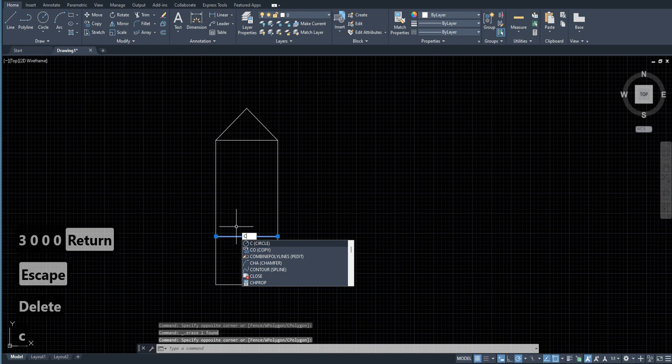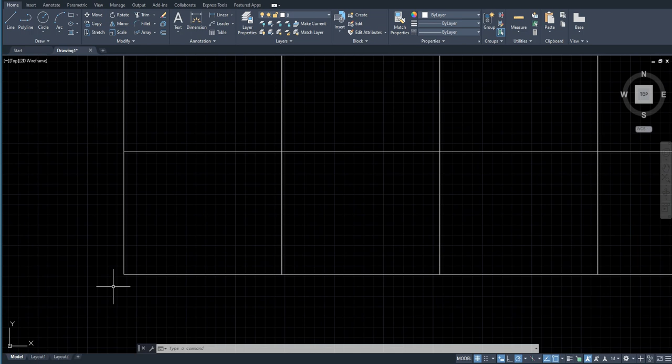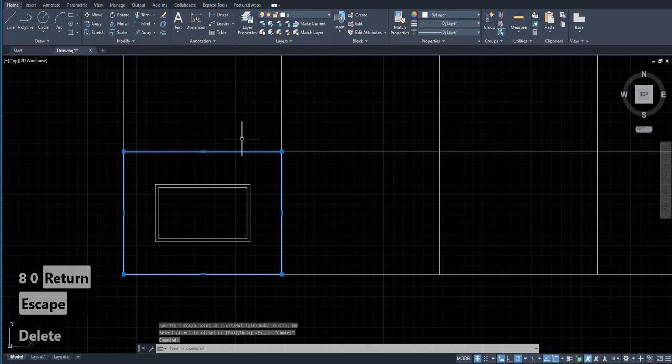Suppose I have these 4 little houses connected to each other, and I want to make a window like this. And I made one window, and I want all of the floors and all of the 4 houses to have the same window. So for that, I'm going to use the command rectangular array.

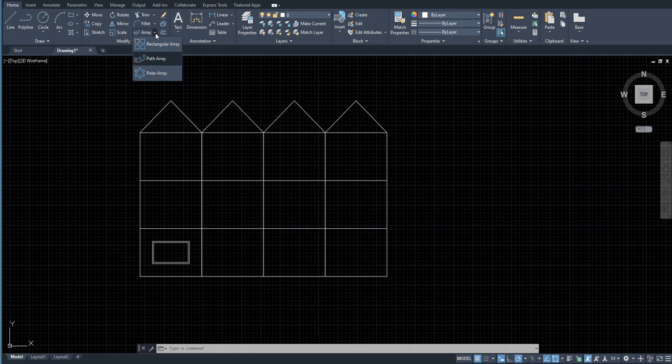I just go on this small arrow, and click on the drop down menu. From here, I select rectangular array, and it's asking me to select the objects. So I select a window and press enter. The moment I pressed enter, you can see there are 4 columns and 3 rows of the same object that have appeared in a grid kind of format.

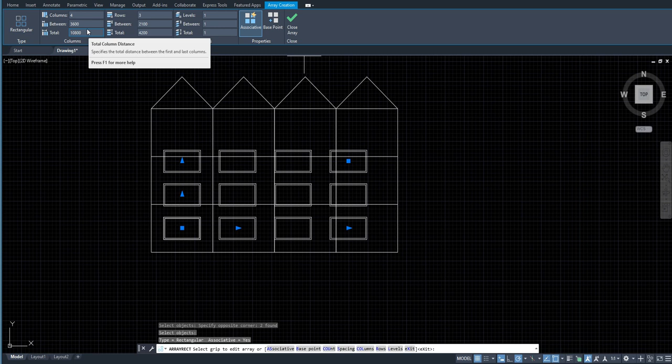Above in the home panel, you can see a new ribbon has been created called array creation. Here you can see the type of array is rectangular array, and there's a section for columns which says the number of columns is 4. The rows section shows the number of rows as well.

The levels command is basically used in AutoCAD 3D, and in this particular tutorial we are discussing AutoCAD 2D, so I'm just going to skip this. There's also properties and close array - close array just closes this ribbon. I'm going to be discussing each of these ribbons one by one.

Over here you can see the default number of columns and rows for the array command is basically 4 and 3. This is the exact number of rows and columns that we're going to need for what I was going to do.

Just for your sake, I'm going to change one of them to say 5, and you can see a new column has appeared towards this particular side. I'm just going to press Ctrl plus Z.

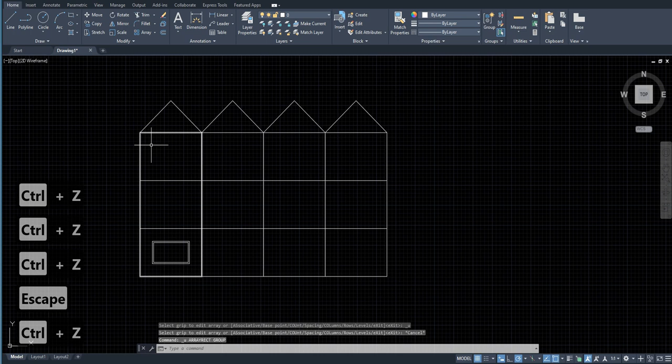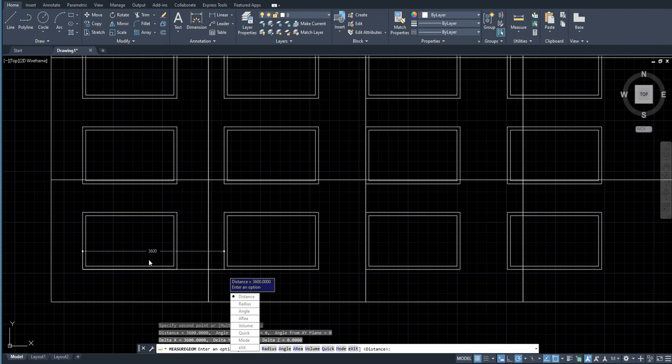Over here it shows the distance between the two columns. So I'm going to show you the distance. You can see the distance here is 3600, and if I select this again, it's showing the distance between them to be 3600.

This particular distance is between any two similar points in the array. So the distance center to center is 3600, the distance corner to corner is 3600. That's how it works.

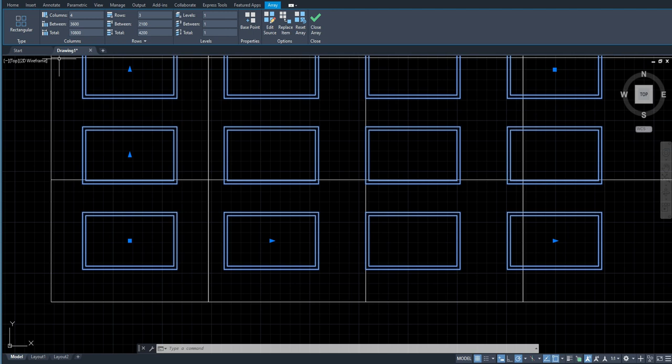Over here you can see the total distance to be 10800, as you saw. I'm going to select this once again, and increase the distance to say 3000 or 5000. I guess 5000 will do. No, I'm going to change it back to 4000.

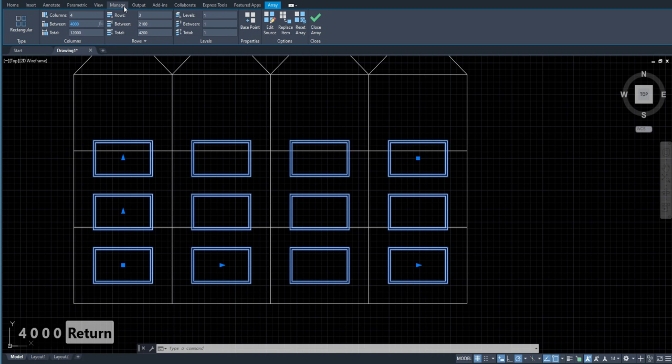And it's perfect. So the rows column is particularly similar to the columns. You can see there are 3 number of rows. You can increase the number of rows however you want, and the distance between them and the total distance. I'm going to increase the distance between them to say 3000, and it fits perfectly.

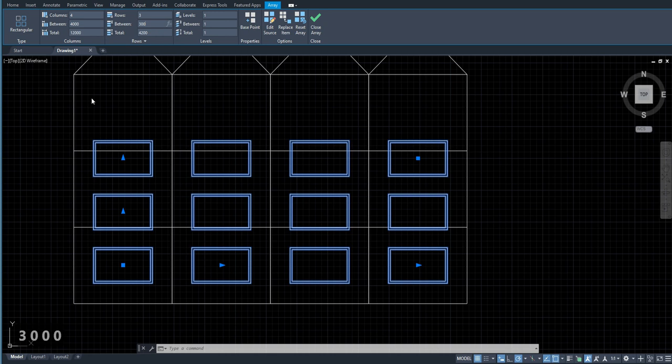Now if I exit this array command and select the window, any window for example, I just select one object and the whole array gets selected, because AutoCAD treats this whole array as one particular object.

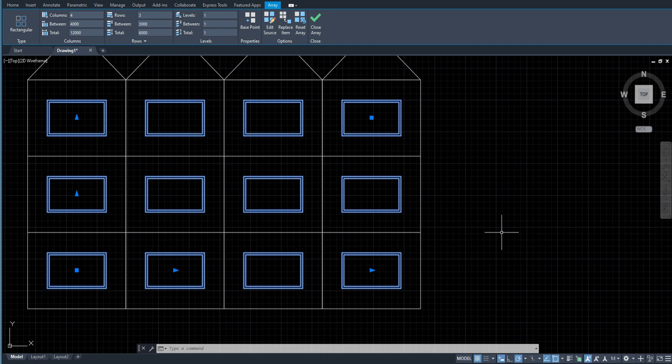You can see there are various arrows in our array, so I'm going to tell you what they mean. The first point is the small square point in the left side bottom corner. If you select this, it is basically used to move the entire array to different places.

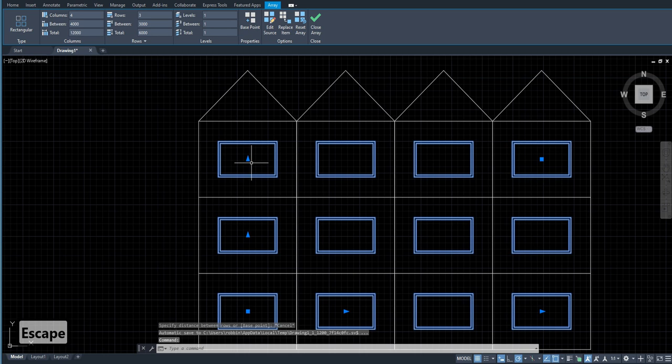This particular arrow helps me increase the distance between two rows. And this particular arrow helps me increase the number of rows. So if I select this and drag my mouse, the number of rows keep increasing.

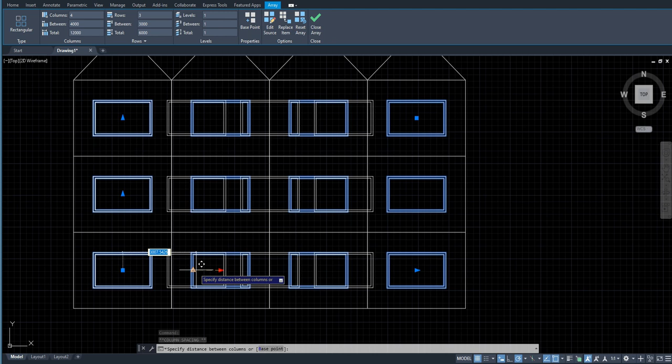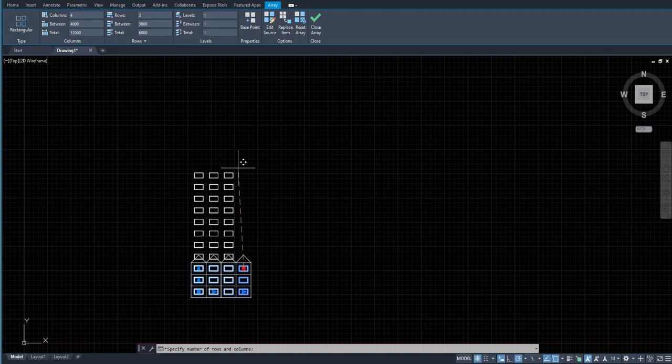Similarly for the columns side, if I select this particular arrow, it helps me increase the distance between the two columns, and this particular arrow is used to increase the number of columns. This point on the top right hand side is used to increase both rows and columns simultaneously, while keeping the distances we specified earlier the same.

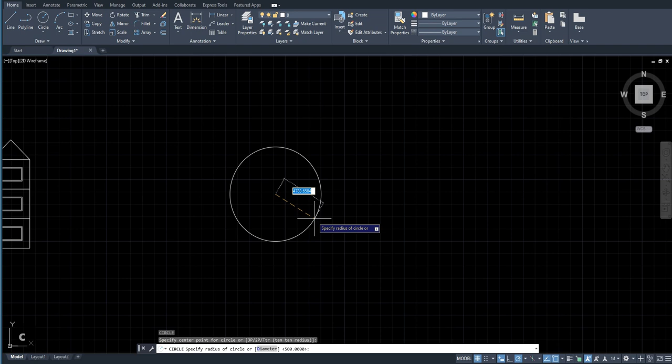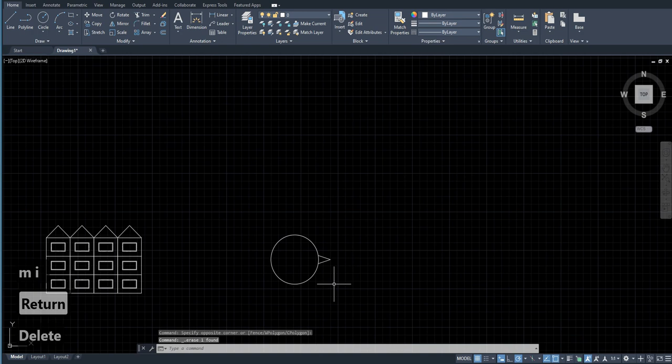So I hope you understood what rectangular array is. The second array we're going to be discussing is the polar array right over here. So with that, I'm just going to create another example. So you can see I just created this small triangle kind of figure with this circle.

Polar array is basically used to evenly distribute object copies in a circular pattern around a center point or an axis of rotation. You can see how it's used in creating different copies of a chair around a table. This is just an example AutoCAD is showing.

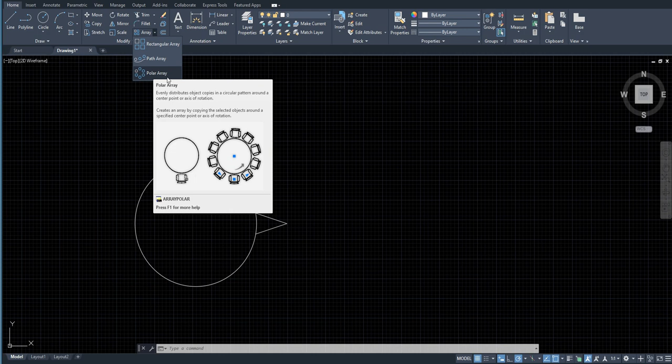Because over here we don't have distance, we have angle - this distance is measured in angles. So the angle between these two items is 60 degrees, and the fill is 360 degrees. That means the total area that all of these objects are covering is 360 degrees, so it's evenly distributing all these items across the whole circle.

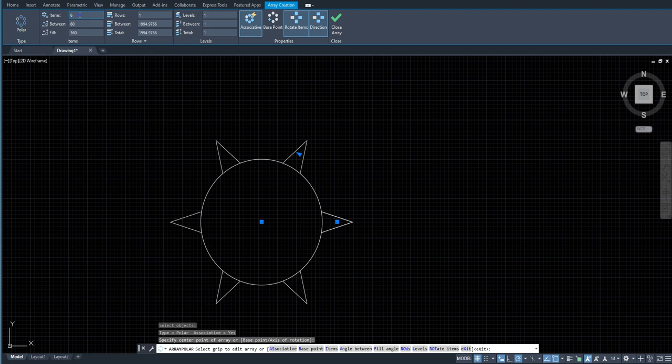So if I increase the number of items over here to say 10, the angle between them has decreased to 36 and the fill is still 360 degrees. So if I change the fill to 180 degrees, the angle between them has changed to 20.

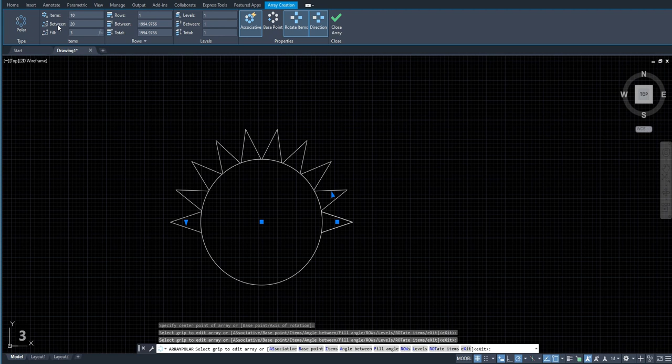So if I again change the fill to 360 degrees and attempt to increase the number of items to 15, the angle between them has changed to 24 and the fill is 360. So that's basically how, if you understood, what we increase and what gets decreased. If you just try this on your own, I guess you'll be able to understand this better.

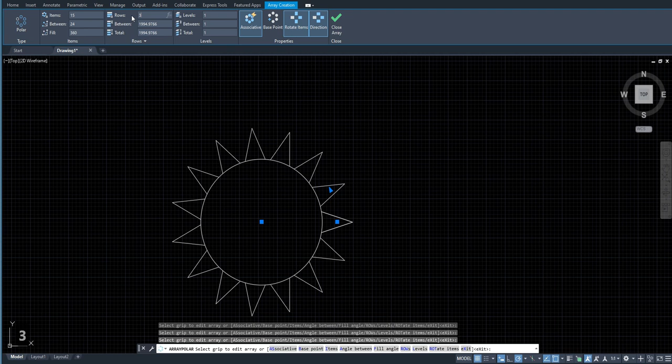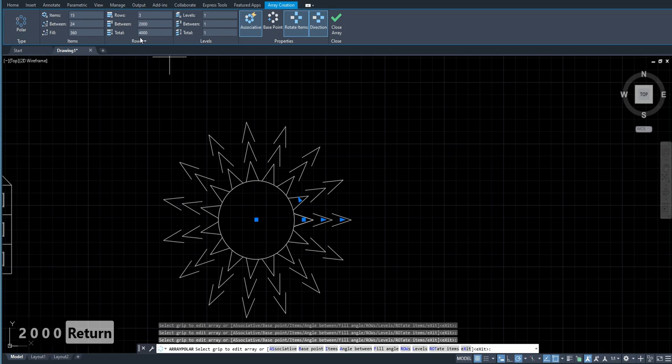The second part is the rows. The number of rows is presently set to default, which is 1. If I increase the number of rows, let's see what happens. If I increase it to say 3, you can see 3 objects there. There are 3 rows being created with the same center point, distributed along the same circle. The distance between them is set to 1994. You can change the distance over here to say 2000, and the total distance would be 4000 because we have 3 objects. The levels option is used in AutoCAD 3D, so I won't be discussing that.

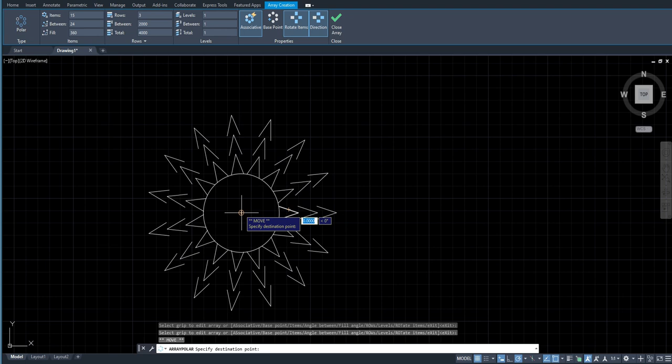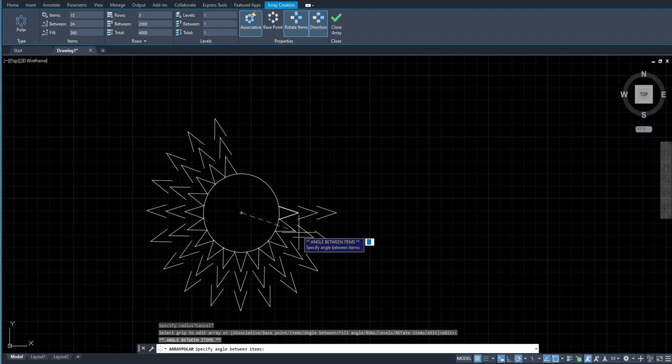Over here you can see there are also different points and arrows in this particular array. The center point is used to move the whole array to different parts of the workspace. This particular point is used to increase the distance from the center of the whole array. This arrow helps us change the angle between the two objects in an array. One of these arrows is used to increase the distance between two rows in an array, and this particular arrow helps us increase the number of rows in your array. So I hope you understood the polar array.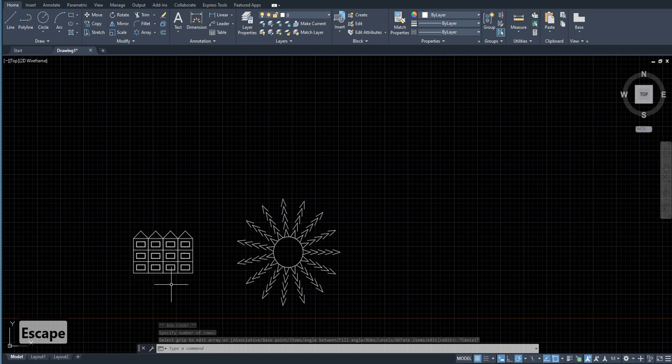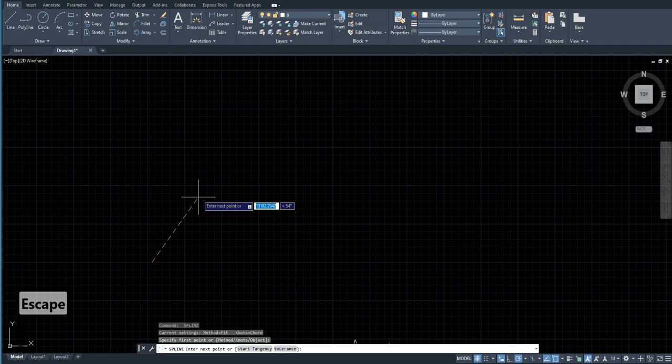Now we are going to discuss the path array. For that, I'm just going to create a path using a new command called spline. Spline is a command basically used to create curves in your AutoCAD file - it creates curves somewhat like this. So let me just make a curve. Over here you can see I just made a curve using the spline command, and as an object let me just make a circle over here. So the circle we have, and we have the path.

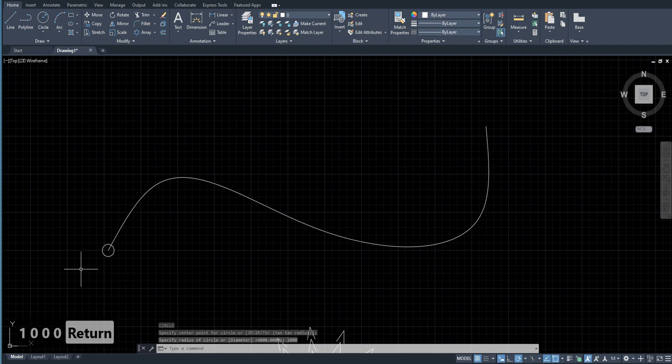So now I'm just going to select the small arrow and select the path array. For the object I'm just going to select the circle, and now it's asking me to select the path curve. The moment I select this path curve, AutoCAD has distributed my object along this curve using default values it already has. You can see the number of items is 30, the distance between them is 3000, and the number of rows is 1.

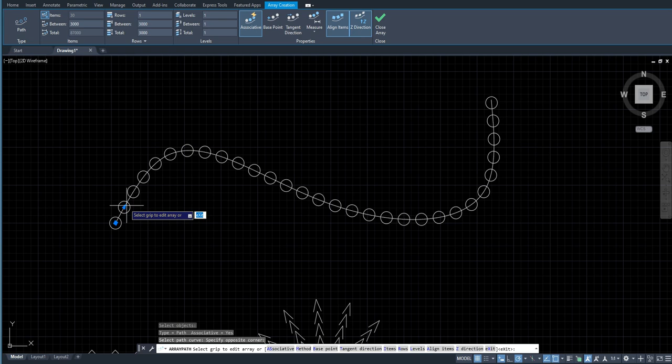So this is a particularly different type of an array. You cannot actually move the array. For example, if you try and select this point, it just basically increases the number of rows for this particular array. It does not change the position of the array.

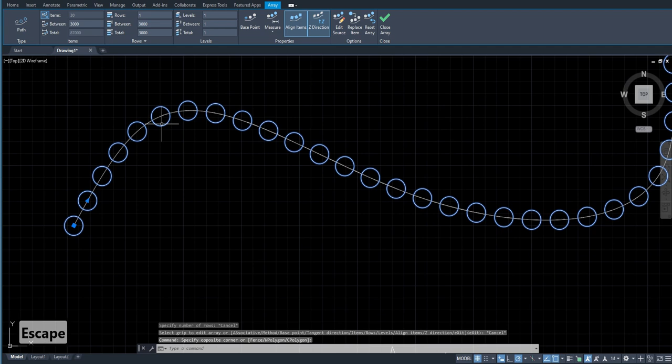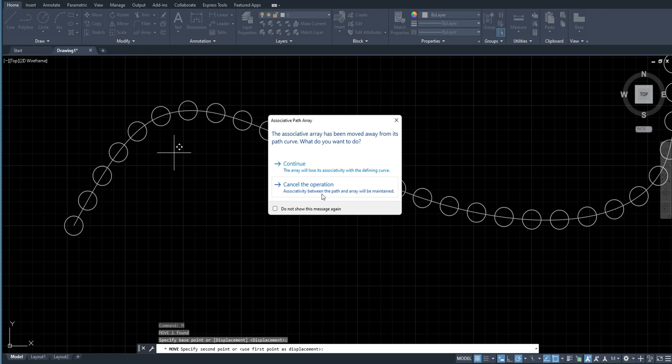However, if you think you can just use the move command and move our array, you see AutoCAD has shown me this warning which is telling me that you're moving the array away from its path curve. That means the array will lose its associativity with the defining curve, and if you cancel the operation, associativity between the path and the array will remain. So if I just move this array away from this path curve, it won't be an array anymore, it will change properties. That's the warning that AutoCAD is trying to give me.

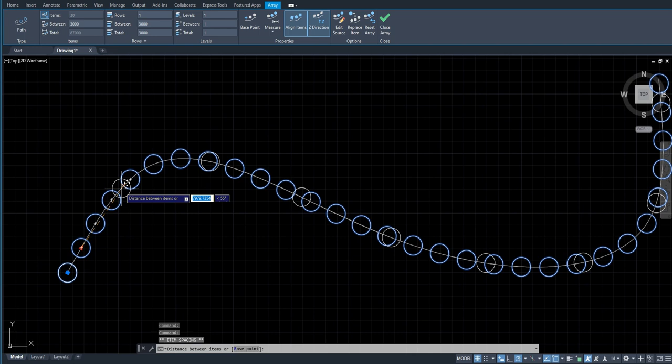And if I select this again, you can increase the distance between these two objects. Now the thing to be noted over here is that the distance between these two objects is along the curve. It's not the shortest distance, it's not the displacement between these two objects, it's actually the distance measured along the curve over here. So that's how the path array works.

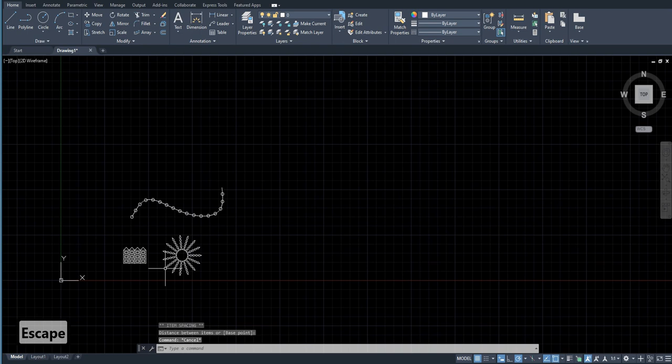The second thing we're going to be discussing is the command lengthen. And after that, I'm just going to create another example over here. Let me just delete this and I'll just create an example.

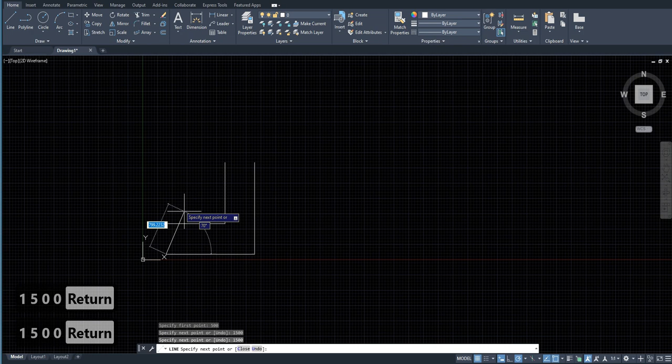If you saw, I just used very basic values for us to remember them, and the lengthen command is a pretty self-explanatory command. It lengthens lines or sections that are basically a part of lines, polylines, curves, etc. So the shortcut for lengthen over here is this particular batch, and also you can type the command lengthen from over here. You can see that there are 4 variants of lengthen, namely delta, percent, total, and dynamic. So by default the total command is being selected over here, so I'm just going to use that.

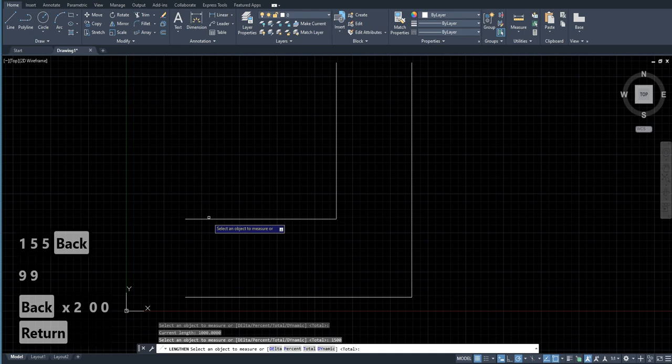Now if you remember, the length of this particular line is 1000 units. If I increase the total length to say 1500 and press enter, and if I go to this object by this particular line, it's just asking me to specify the total length over here. I'm just going to press enter, and if I go to this half of the line, it's going to lengthen from this point, and if I go to the second half of the line, it's going to lengthen from this side.

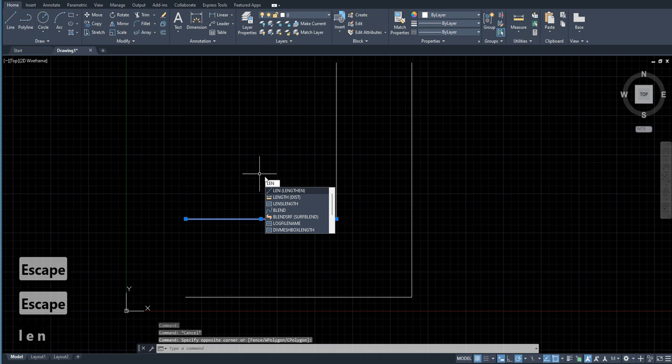If you want to shorten the line, you can alternatively use a lesser value. For example, if I just select this and use the command lengthen, and use a value like 500, which is a shorter value than the original one, whichever side I go, it's just going to shorten the line from that particular side. So this is how the total command works.

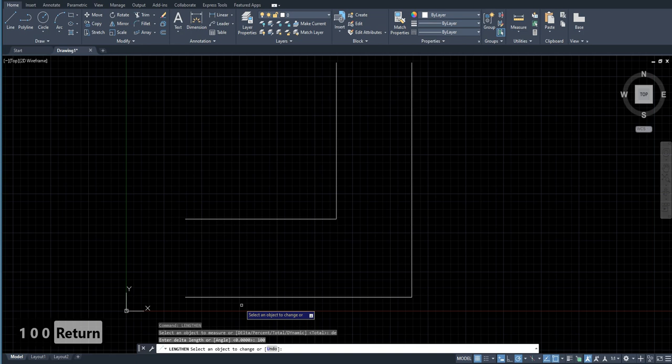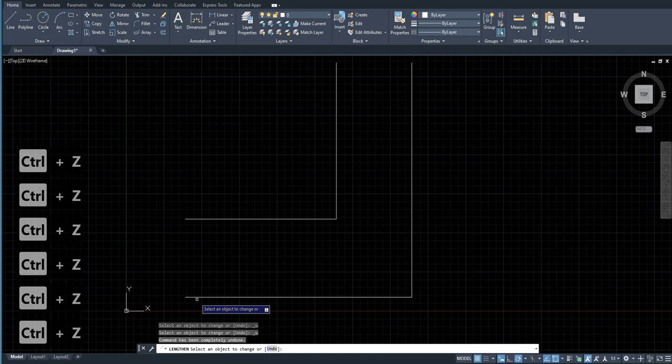The second part over here is delta. Now the delta command adds that particular value which we will enter to the current length. So let me just try that. I'm going to press DE, and it's asking me to enter delta length. So for example, I'm just going to be typing in 100. Press enter. So whichever side I go to the line, if I go to this half of the line, it's going to lengthen the line from this particular half, and I can just keep on clicking it, and it'll just keep on increasing the length. If you want to shorten the line, you can alternatively enter the unit in a negative value. That's just going to shorten a line.

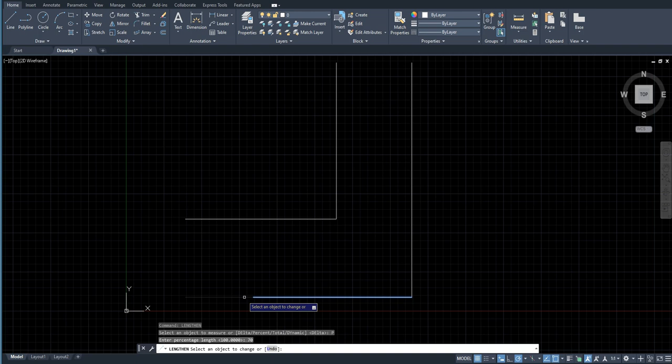The third part over here is percentage. I'm just going to select percentage, and it's asking me to enter the percentage length. Say I choose 70%, so it's just going to reduce the length to 70% of what it originally was. That means it's going to shorten 30% of its original length. So if I select this object, it's decreasing its length from this particular half. If I go to this particular object, it's decreasing the length from this half. So obviously 30% for this line is more than 30% of this line. So that's how the percentage works.

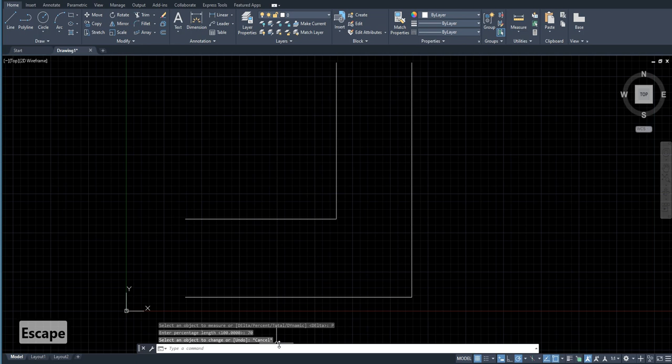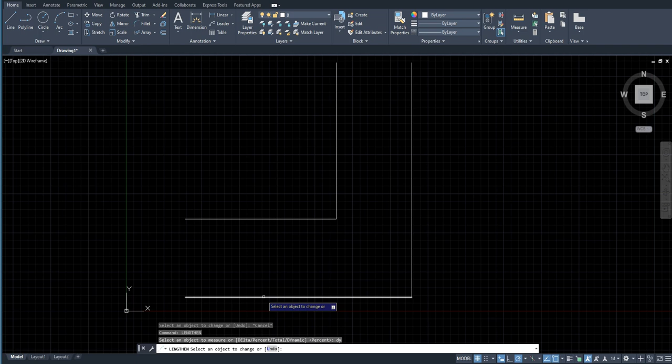If you want to alternatively increase the length, you're gonna have to type, for example, if you want to increase 30%, you're gonna have to type 130 for this command. Now the last variant of lengthen is dynamic. Let's just type that. What the command dynamic does is, it's basically more like stretch. So if I just select this object, wherever I take my cursor, it's going to increase the length to that particular point. So it's basically like stretch. So I hope you understood the various commands of lengthen.

The next command we're going to be discussing is the command break. For that, let me just create a rectangle.

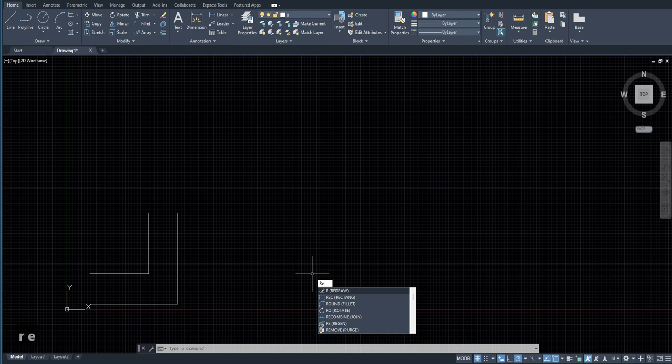For example, we have this particular rectangle, and if I select this, we have these 4 points, and we can increase or decrease its sides by stretching these lines, these points. The command lengthen, and the command break, you can see it has two options.

One option is break, which breaks the selected objects between 2 points, and the second is break at a point. First I'm going to discuss the command break. If you select this, it's asking me to select the objects.

Now if you see, whatever point I select the object from, it breaks that object from that particular point. If I don't want that and want to reselect my first point, I just type F, enter, and it's asking me to specify the first point again. Say I want the point to be this particular point, and wherever I take my cursor, it just breaks the whole polyline to that part.

So the second breakpoint is presently, say I want the second point to be this point. Now if I select this object, it's being broken down at these two particular points. So that's what break does. I basically use the command break to create doors, windows, and walls. It's a pretty easy and convenient command.

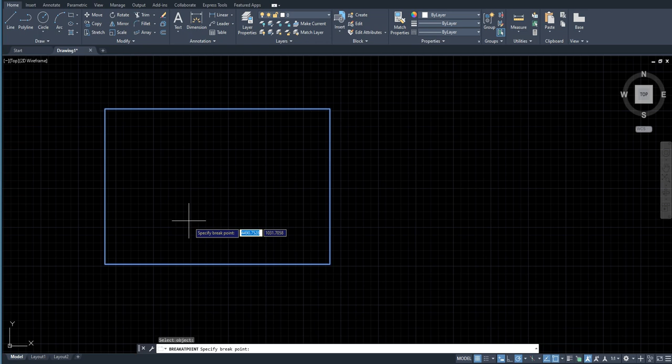The second part of break is break at a point. If I select this, it's asking me to select the object, and now I can specify a breakpoint. For example, I want the object to break from here. So if I select this, we can see the rectangle is now broken into two different parts from this particular point. So that's what the break command does, and two variants of it are there.

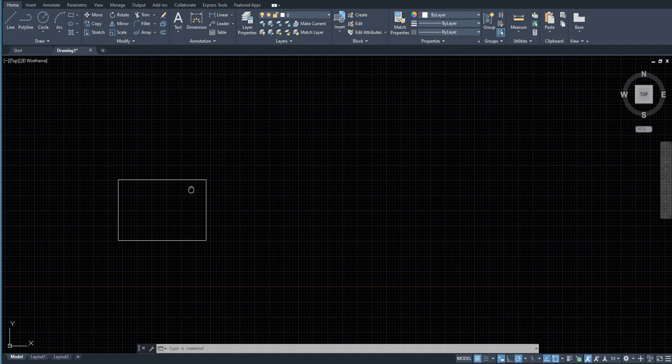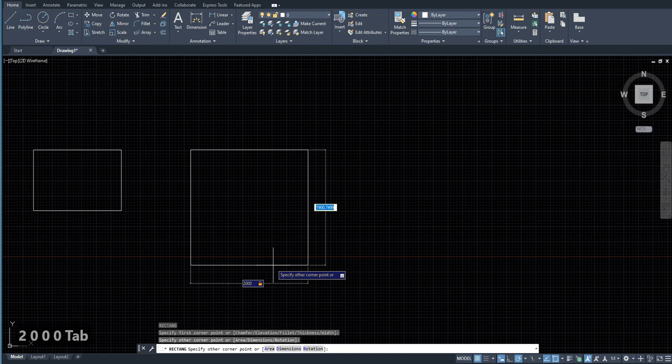The third command we are discussing is align. For that, I'm just going to create two different objects. One rectangle is this, the second rectangle, let me just make it. Suppose I have these two rectangles, and let me rotate it so I can realign it later.

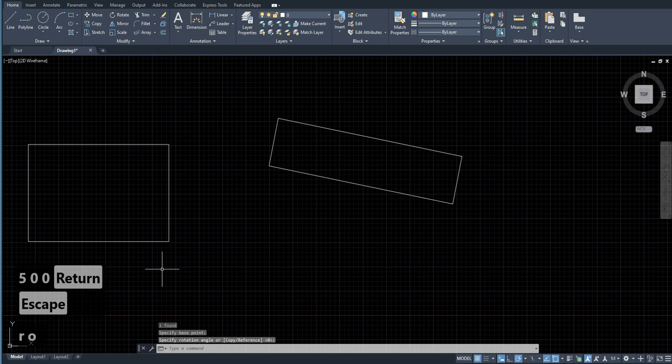Suppose I have these two rectangles and I want this rectangle to be aligned with this particular rectangle. What I'll do is use the command align. You can type in the command or select it from here. It's asking me to select the objects. I'm going to select these two objects and press enter.

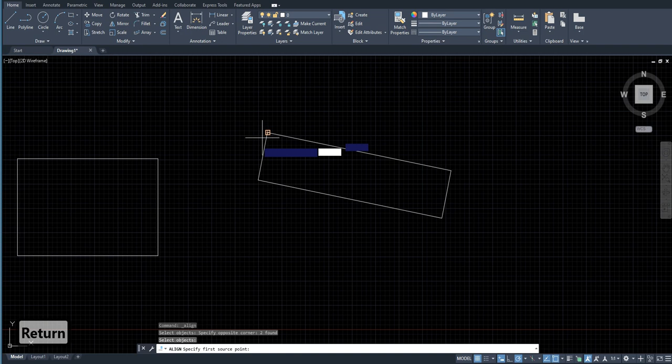It's asking me to specify the first source point, meaning it's asking me to specify the points where I want them to be. So I want this point to be aligned with this point, and this point to be aligned with this point. And I'm just going to press enter.

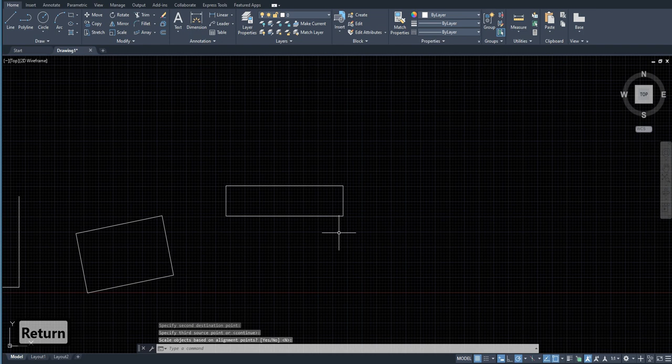Now it's asking me to scale the object on the basis of the alignment points, because the length of this line and the length of this line, or the distance between these 2 points and these 2 points, is fairly different. So if I just select no and press enter, it's just going to align my object like this.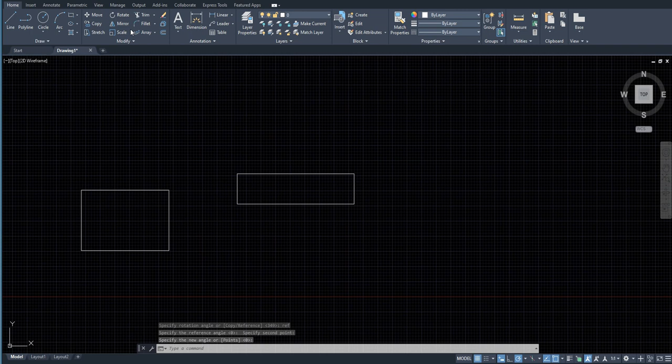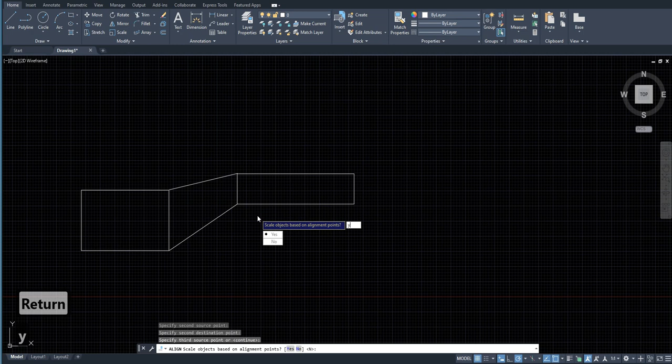Alternatively, if I select yes — for example, if I just use the command align again, and press enter, it's asking me whether to scale, and this time if I select yes, then my object would be scaled like this.

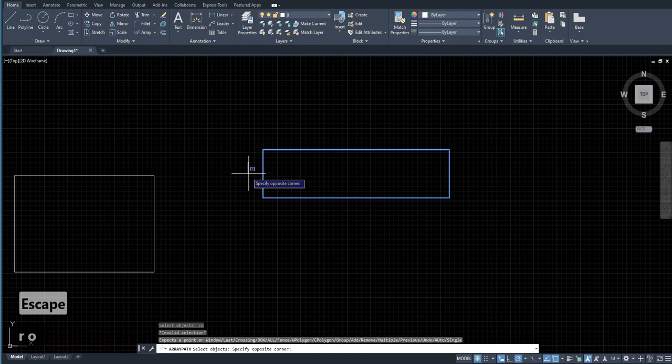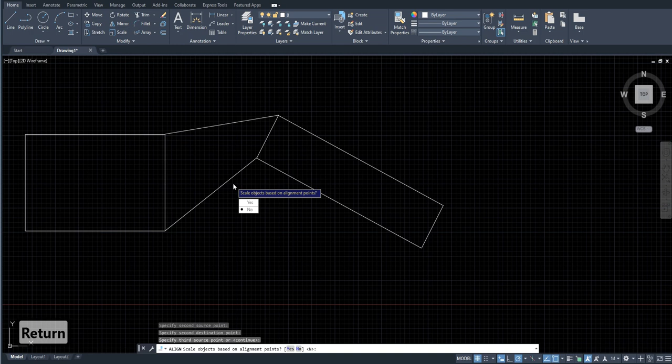So presently I'm selecting both my objects. If I just select one of them, for example, I rotate this one again, and while using the command align, I use one particular object and click enter. It's asking me to specify the points. I specify them again and press enter. It's asking whether to scale. I say no, and now it is aligned to this particular object over here.

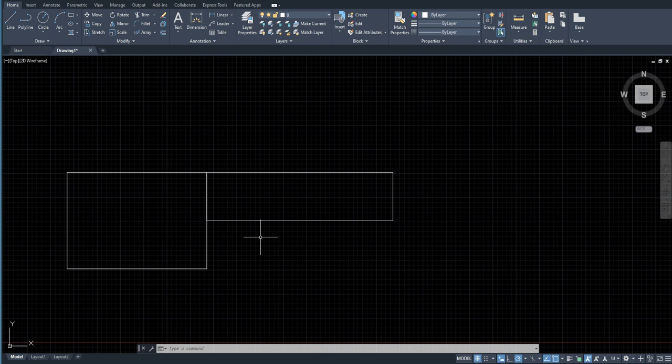Obviously, instead of using the command align, you can use the command rotate and move, but sometimes that's a pretty lengthy process. For example, if I just want to align my axis, instead of this point...

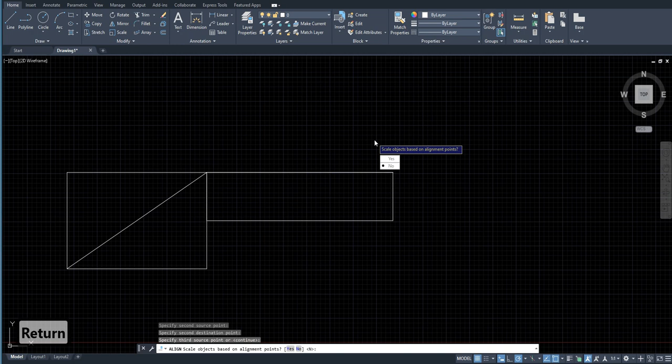I'm just going to select these 2 points for now. Let me see what it does, and I press enter. It's asking whether to scale. I'm going to say no. So it just aligned my object like this. That's how the align command is used.

I hope you understood the commands align, lengthen, break, and obviously we discussed the command array in this particular video. So thank you for watching and keep practicing.